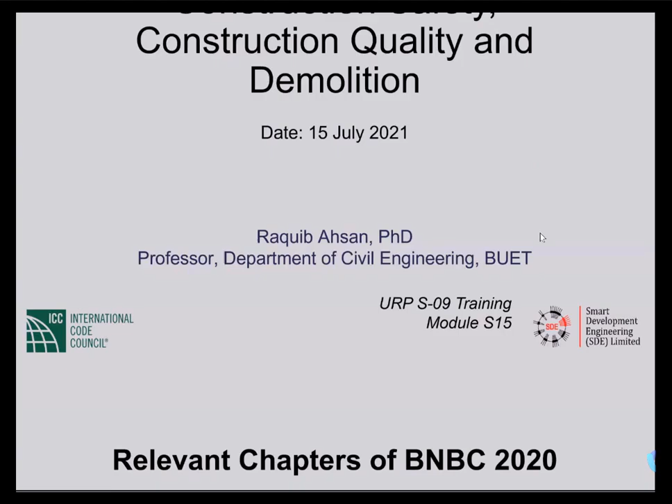So let's start today's topic, which is construction safety. Mostly it's about safety, then a little bit about construction quality and demolition. This is related to Part 7 of the Bangladesh National Building Code 2020, but it also involves some provisions of Part 1 Chapter 2, Part 5 Chapter 2, and some provisions related to concrete in Part 6 Chapters 5 and 6, but mostly it's Part 7.

So the outline of today's presentation is like this, more or less in line with the way it is arranged in BNBC 2020. First we'll talk about constructional responsibilities and practices, then storage of materials, safety during construction, safety during demolition work, a little bit about construction quality and quality control, which is evaluation and acceptance of concrete, and enforcement of these provisions.

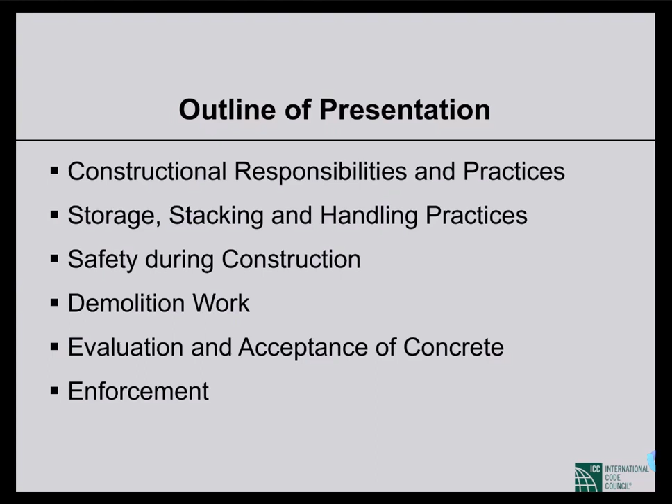So let's start with constructional responsibilities and practices. This is actually Chapter 1 of Part 7 in BNBC. The topics covered in this chapter are planning for construction, construction control, construction management, and very importantly, protection of public and workers, and environmental protection.

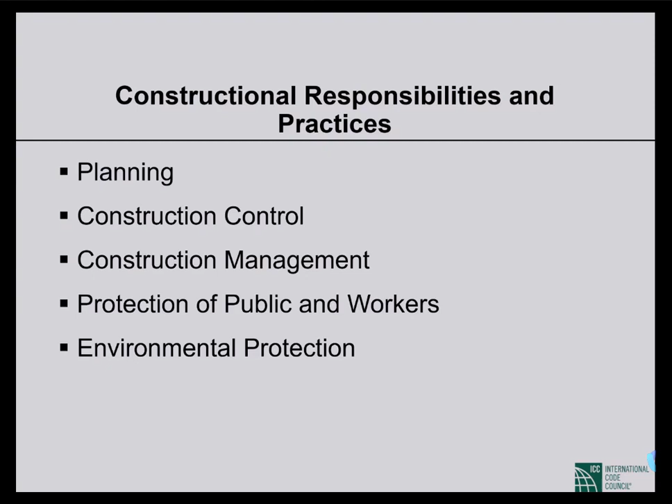So let's first start with planning. Everything starts with planning. For construction, planning is probably the most important phase. After design, before going for construction, a thorough planning is very much needed for a smooth construction.

Before planning, it's very important to know what are the responsibilities, and more particularly, responsibilities of different parties involved - the consultants involved in the project, the owners, the contractors. It should be very clear what are the responsibilities of which party - the owner, the consultants, the contractors - and this should be in black and white, not just understanding. It should be properly reflected in the contracts, in the contract documents, in the terms of contracts.

That is very important. If there is any vagueness in the contracts, that causes problems subsequently in the construction phase. This is very important. A good contract can ensure good construction. So that is extremely important. We have to be very meticulous about preparing a contract.

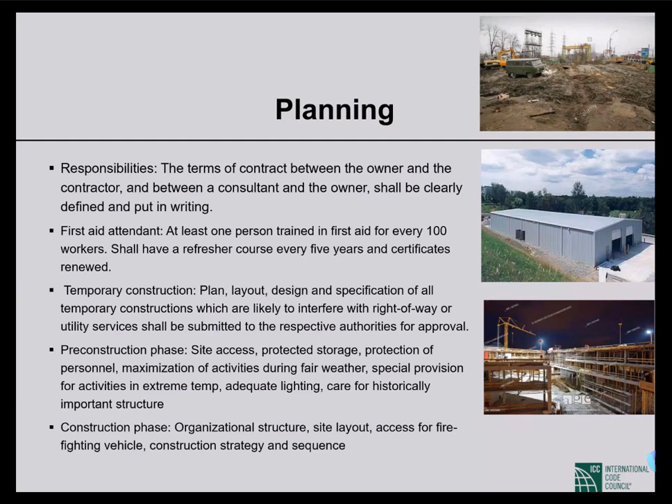Fire protection during construction is another very important topic. And in general, the construction strategy and sequence should be planned so that the whole construction phase could be completed smoothly. We'll talk about some of these issues a little bit more elaborately in the pre-construction phase.

During the planning phase, a suitable construction strategy should be adopted. This means a suitable construction method should be planned, along with an appropriate building system and appropriate materials planned in the design phase. For construction, competent and adequate manpower should be resourced. Similarly, proper equipment should be resourced, and for operation, proper operation techniques should be followed. All these should be given very careful thought in preparing the construction strategy.

And the construction strategy should also consider local conditions like local terrain, local climate, and vulnerability to disasters if there is any for that site.

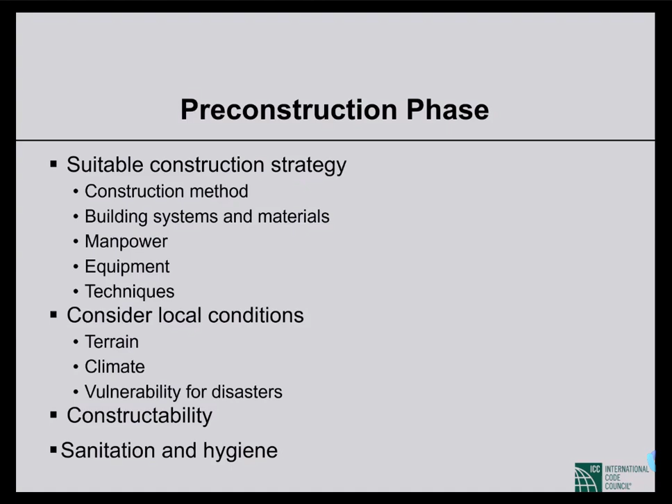When we talk about consideration of local conditions, there are some particular instances mentioned in the code, like in cities we should consider the restricted space available in city areas. So when planning for construction, we have to think about how to accommodate different equipment, warehouses, storage spaces, and toilet facilities, and that should be properly planned for, because space is not that much available in city areas.

And in city areas, in most cases, just beside a construction site there are adjoining structures. So we'll talk about that too - we have to take all the measures necessary to protect adjoining structures. This is the responsibility of the owner of the building that is going to be constructed.

And in city areas, utility lines are usually underground. So while excavating, we have to be careful so that we don't damage any public utility lines, like gas lines. Quite often that causes accidents, gas explosions, etc. So we should be aware of these things in cities.

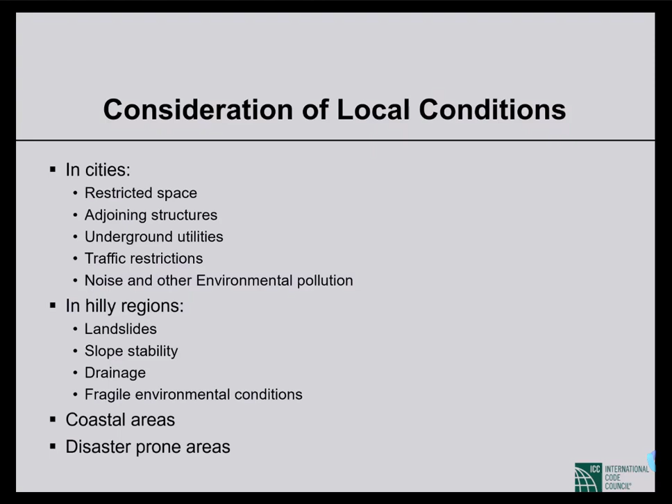In particular, when we have to go for construction in adverse weather, like in rainy season, in our case most of the time rainy season is the adverse weather. But sometimes, like in very hot and humid conditions, we have to go for different types of construction activities. Or in very cold weather, although in Bangladesh we don't have that problem. But if you go to a foreign country and engage in construction activities, you should know. But this is, of course, BNBC, so we'll talk about only Bangladesh.

So site layout which enables accessibility in adverse weather. The site access should be such that even in adverse weather, there is no problem in accessing the site. Like in our case, there should be canopies so that in rainy weather we can protect our equipment and people from rain.

Adequate protected storage for weather sensitive materials and equipment. We'll see in the storage of materials chapter that materials are classified into 5 types. One of them is weather sensitive materials. For example, cement is very, very sensitive to weather, very sensitive to humidity. We all know that. So we have to think about how to store them properly, cement, and other weather sensitive materials and equipment.

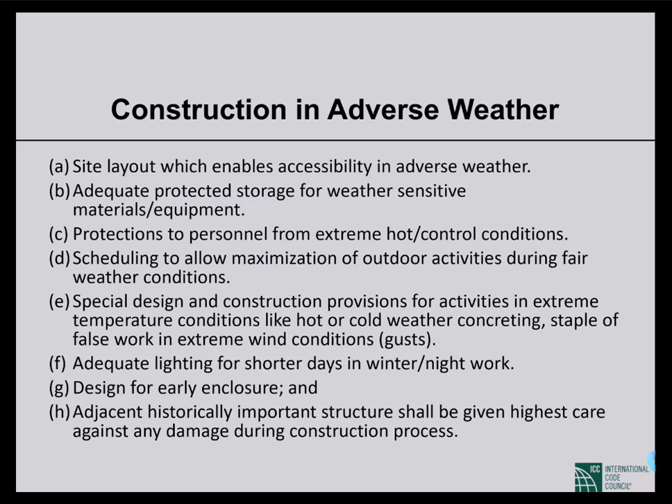During construction phase, the site layout is very important. We should have a proper drawing of the site layout, and in it, everything should be marked clearly, like the access and exit should be easy with proper parking, because trucks supplying materials have to be parked. So those parking areas should be properly marked, and there should be separate vehicular and pedestrian access and exit.

In the same access, people and vehicles should not access in the same way. There should be different access for pedestrians and vehicles. That is one thing. Another thing is the ground condition should be leveled so that the access is easy.

Properly located material stores for easy handling and storage. It is not a good practice to have a material store quite far from the location of construction. It should be placed in such a way that the entire construction site is within reasonable distance.

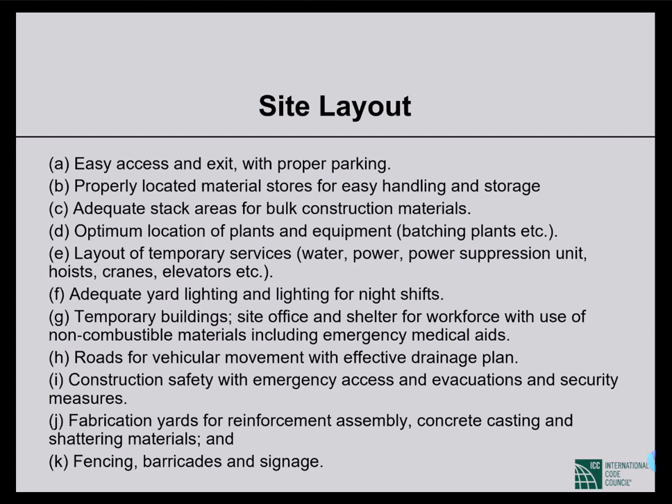As I was saying, access for fire trucks and firefighting equipment vehicles should be there at every construction site. This access shall be provided at the start of construction and maintained until all construction work is completed, so for the full duration of the construction this access should be there.

Free access from the street to fire hydrants or static water tanks, where available, shall be provided and maintained at all times. In Bangladesh, we don't have fire hydrants available near a construction site most of the time.

But there should be a source of water that can be accessed in case of fire, and that source should be easily available. During building operations, free access to permanent, temporary, or portable first aid firefighting equipment shall be maintained at all times. For different types of fires, we use different types of fire extinguishing equipment - sometimes we use sand instead of water. Those should be kept in such a place which is easily accessible. In all buildings over 2 stories high, at least one stairway shall be provided in usable condition at all times.

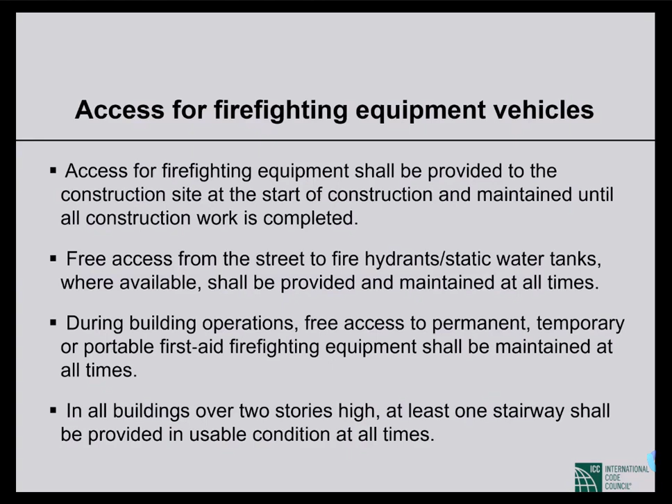Now, those were related to planning. Now we'll talk a little bit about construction control. Construction control is more related to the control by the authority, or from the authority side. So one control the authority would require is site preparation.

In any case, the client will always first want to see if you have prepared the site or not, as a contractor. So bush, debris, etc. shall be removed. Temporary buildings should be so located as to cause minimum fire hazard, made of non-combustible materials, etc. So whatever you put on the site plan or site layout, you prepare the site accordingly.

Then permits - storing materials on roads, using public utilities, digging roads, storing explosives, affecting historical structures - for the activities for which you need permits, you should acquire the appropriate permit.

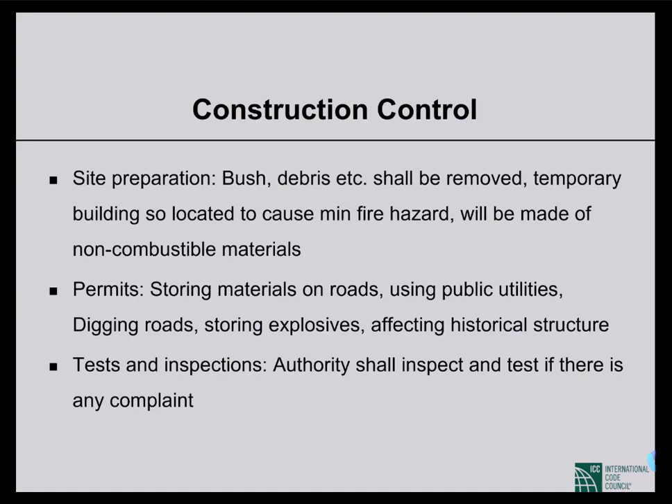Construction management - there are many other provisions in the code regarding construction control, but I have just picked a few points. Now we'll talk about construction management. When construction is going on, how will the contractor manage? What are the issues that a contractor has to think about, has to take into consideration?

One is time management. There are deadlines for construction, and there are schedules and plans to meet the deadline. But in many cases, there may be situations where there are delays, or changes in the sequence of construction activities. So in those cases, the contractor has to think how the deadline will be achieved in spite of these changes.

So that is time management. I think you are quite aware that now there are many different BIM tools and other project management tools that can be used for this purpose. So this is well practiced, right?

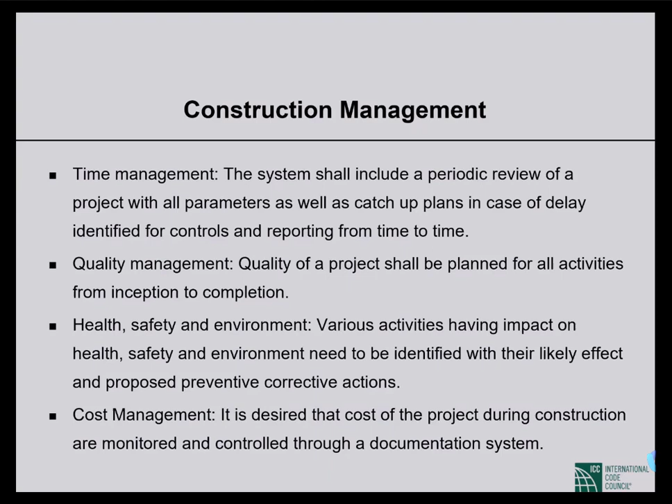Now, the important things, quite elaborately in detail, this is described in the code, that is protection of public and workers. This is quite a large section or article in the code. I have picked only a few points from there. So first of all, adjoining property.

We'll talk a little bit in detail about these. So no part of any structure except signs shall project beyond the property line. Basically, nothing but only signs can be outside of your property line. But if you need, you can take permission from the proper authority or the owner of the adjoining property to use some space from the adjoining property.

Protective fences and railings. On the top right side, you can see a fence, and in the middle you can see railings shown in red and yellow color. There are quite detailed relevant provisions mentioned in the code. Railings, for example, railings adjacent to footpath or excavation shall be at least 1 meter in height. I'm just quoting these to show you how detailed the code is about all these protective fences, railings, canopies, overhangs, platforms, etc.

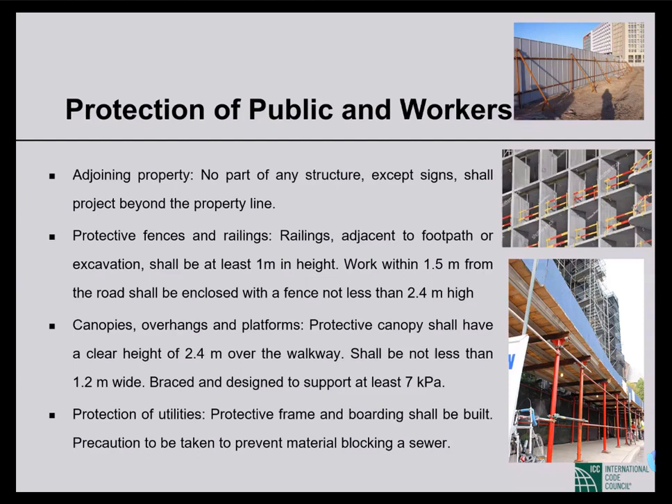More provisions related to protection of public and workers: use of road and footpath. I have already mentioned this, that it may be used - it is not prohibited. This is not good practice, but sometimes you cannot avoid this. So you may use a road or footpath only temporarily during construction, but with permission. You have to take appropriate permission from the city authority, like in case of Dhaka it will be either DNCC or DSCC.

Dhaka North City Corporation or Dhaka South City Corporation - construction shall be more than 1.5 meters away from a railway track. In no case can you do construction activity very close to a railway track; it has to be at least 1.5 meters away.

A walkway shall be constructed. So when you block a road or footpath, you should build a detour, a walkway, so that pedestrians can use that. A 1 meter clear passage shall be maintained - so from the construction activity and that walkway there should be a distance of 1 meter.

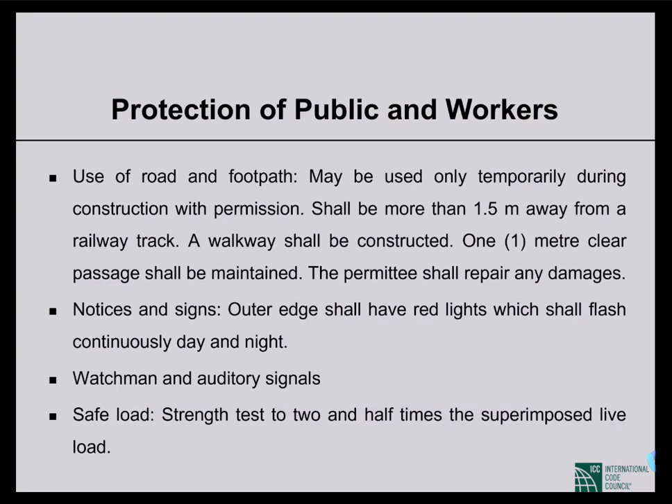Safe load: strength test of 2.5 times the superimposed live load. That is the safe load. For any temporary installations, like canopies, platforms, overhangs, boarding, etc., the safe load for that installation should be at least 2.5 times the superimposed live load that the structure is supposed to endure or take. So the factor of safety is basically 2.5 in this case. That is the definition of safe load for construction related installations.

Now, environmental protection of public and workers. There are some issues from the point of view of environmental protection. The first one is protection of existing drainage systems and utilities. I've already mentioned that in no case, because of construction activities, can the existing drainage or utility lines be blocked or damaged.

So you have to take proper protection for that. Protection of soil, aquifers, and water channels. The water bodies and the land should be protected so that we cannot pollute the water bodies and land.

Safe transportation and disposal of all wastes. There may be many types of waste that can be harmful for the environment, so they should be transported safely and disposed properly.

Waste oils and other petroleum derived wastes shall not be allowed to be used as dust suppressant. We are quite familiar with this problem of dust at a construction site. Those who commute to Gazipur are aware of this - dust is a major problem at a construction site. Dust should be suppressed only by water, not by oil or other petroleum derived material, because those are not good for the environment or for public health. So water should be used as a dust suppressant.

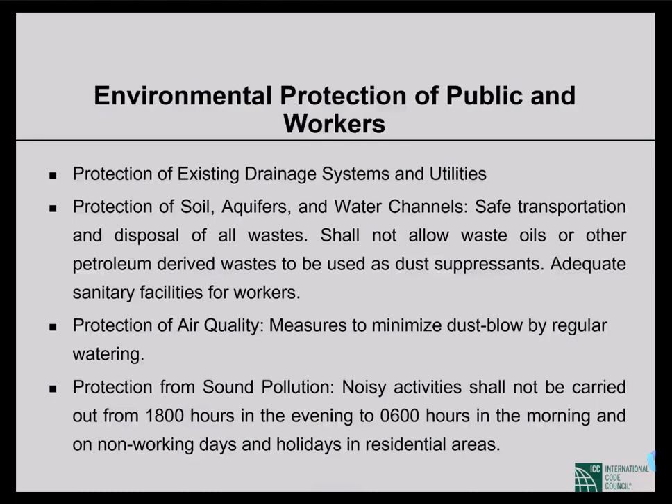Then, as I said, we'll talk a little bit elaborately about how to protect adjoining property. Number one: the owner of the building under construction shall preserve all adjoining structures and walls from damage. So it is the responsibility of the owner to protect all adjoining structures.

Second, if required, the owner of an adjoining plot, building or structure shall be granted necessary permission to enter the construction site, if he or she wants to visit your plot to make his own property safe - that's his privilege. Any structure, except signs, shall not project beyond the property line of the site - that is generally true.

Everything should be within your compound, your property line, but signs can be outside your property line. Sometimes you may need to use some space out of your property line. In that case, you have to take permission.

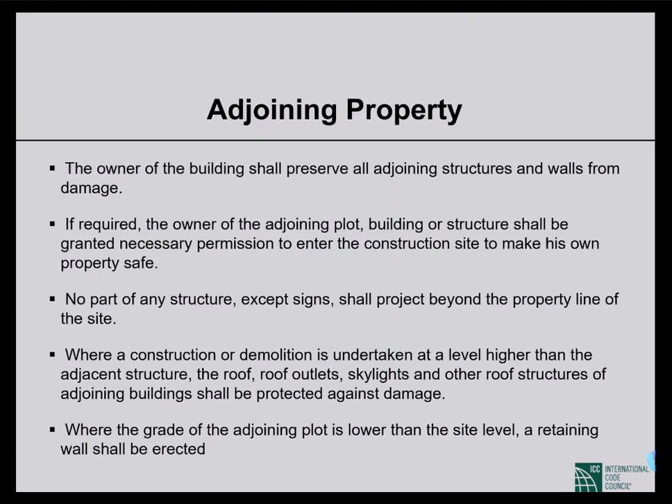So these are some points regarding how to protect adjoining property. But remember, this is the responsibility of the owner of the building. If you want to provide some kind of overhang that will go out of your property line to protect the adjacent structure, and the owner of the adjoining plot doesn't permit that, then it becomes the responsibility of the owner of the adjoining plot. So if something happens, the responsibility will go to that owner. This is also written in the code. So that was all related to constructional responsibilities and protection of public and workers.

Now, before going to the safety issues during construction, we'll talk about how to store materials in a safe and proper way. This is chapter 2 of part 7 of BNBC 2020, about storage, stacking, and handling practices.

Number 1, each workman shall be provided with suitable equipment for his personal safety as necessary. Here we're talking about PPE, personal protective equipment, which we'll talk about later too. For handling purposes, the workmen involved in handling materials should be using proper protective equipment so that they are not at risk.

Then protection against fire is another important consideration while storing materials. Combustible materials should be stored separately. Two types of DCP extinguishers at both open and covered locations. Different types of extinguishers should be at hand in case fire erupts.

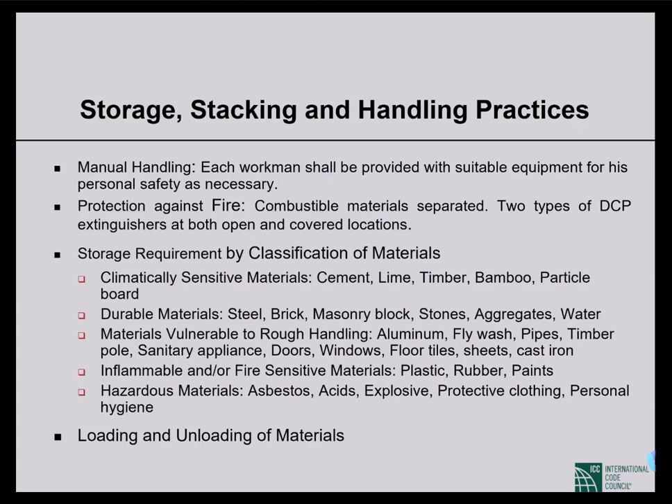So now, as an example, I'll explain a little bit about how to store cement. I think those involved in construction sites know very well how to store cement bags, but there are some code provisions we have to be aware of, like the maximum number of bags we can store, how to stack them. Do you know that?

Many of you might know, but some of you may not be aware that the code has provisions stating how many bags can be stacked. So let's see the provisions.

Cement should be stored at the worksite in a building or shed which is dry, leak-proof, and moisture-proof. Naturally, we cannot store cement bags open in air. We should store them in an enclosed space, and usually there are no windows in those enclosed spaces, or at least we don't open them. They should always be blocked so open air doesn't enter, but at the same time the enclosure should be dry, leak-proof, and moisture-proof.

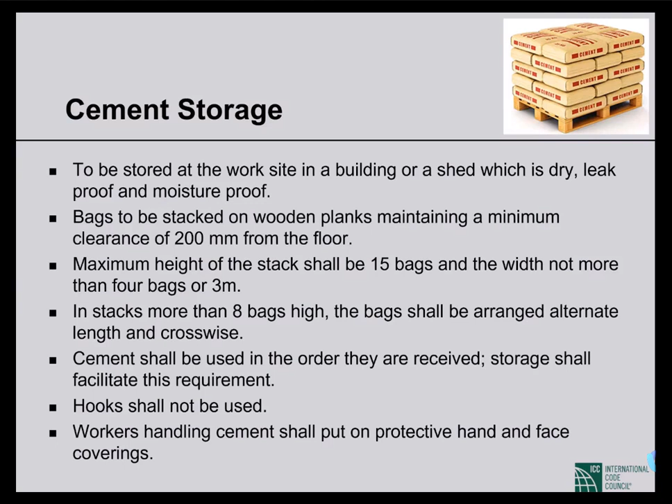But we seldom see that at construction sites in Bangladesh. At least hand gloves should be used. According to the code, both face coverings and hand gloves should be used. So these are some points related to cement storage. There are many other points in the code, so please go and read that section for better understanding of how to store materials. Cement is an example of a climatically sensitive material.

Now, steel is an example of a durable material, so let's see how it should be stored according to the code. It mentions that reinforcement bars and structural steel sections, not only reinforcement bars but also structural steel sections like I-sections or channel sections, shall be coated with cement wash before stacking.

So when you expect your steel has to be stored for a long time, you may coat the steel sections or bars with a very lean cement wash, where the water-cement ratio will be very high. It's kind of a grout, but not even grout, it's a cement wash. You use a little bit of cement in water and spray it on top of the rebar or steel sections, so that cement grains are deposited on the steel, giving some protection against humidity for prolonged exposure to weather.

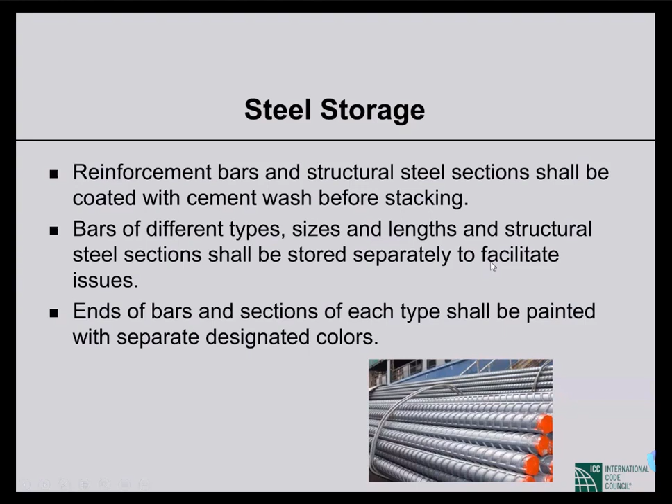So that's all about steel. Then another example of a durable material, which I'm mentioning because it's important: many times accidents happen from brick stacks falling on top of construction workers. So you should know the limits, how many bricks can be stacked on top of each other, what is allowed in the code, that we should know.

Number one, the stacks shall be 50 bricks long, not the height. In length, you may place 50 bricks, 10 bricks high, not more than 4 bricks in width. So 50 bricks long, 4 bricks wide, and 10 bricks high. Those are the limits, so we should be careful about stacking bricks.

It should never exceed 10 bricks high, but quite frequently you can see at the construction site that this is not maintained. Sometimes the height of the brick stacks is quite high, and width quite high, so that they fall and cause accidents.

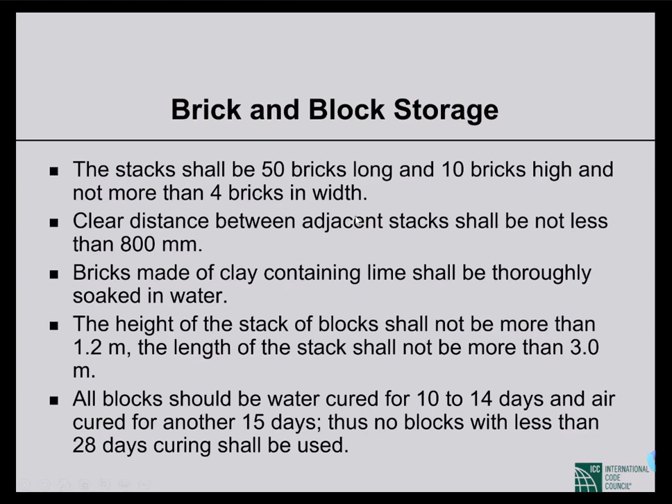As an example of breakable material, we can talk about glass sheets. How glass sheets can be stored. All glass sheets shall be kept dry and stored in a covered space. The reason glass sheets should be kept dry is not because they are climatically sensitive, but

for the convenience of handling. So if the glass sheets are not dry, if they're wet, it's very difficult to handle them, to take from one place to another, to carry them by hand becomes difficult. So that's why they should be kept dry and should not be stored in open air.

Glass sheets shall be lifted and stored upright on their long edges, both for storing and for lifting. They should not be lifted flat or stored flat; they should be stored and lifted upright. Like in the picture, you can see the glass sheets are almost upright.

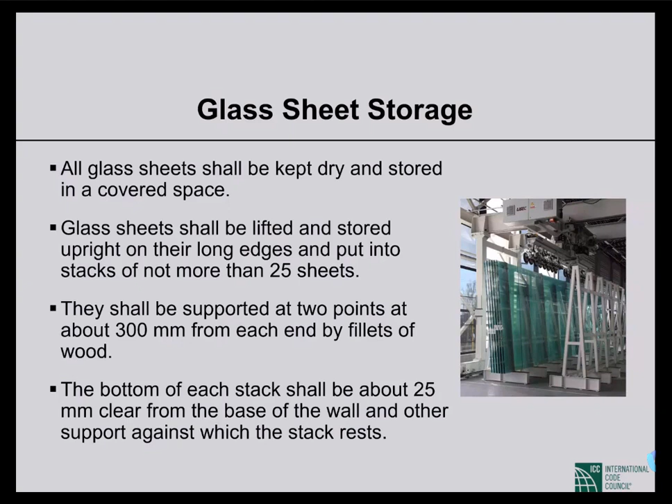So this is an example of how to store glass sheets. There are many other points written in the code about how to store and use glass sheets, how to transport them, etc. So I have just quoted some few points from there.

So we talked about how to store cement, how to store steel sections or rebars, how to store bricks or blocks, how to store glass sheets.

And now this is an example of inflammable materials, paints, varnishes, etc. They are inflammable, they can easily catch fire. Paints, varnishes, lacquers, thinners, and other inflammable materials shall be kept in properly sealed or closed containers. So naturally, you just don't put them in a drum without any lid, not like that. They will usually be in sealed and closed containers.

The containers shall be kept in a well-ventilated location, free from excessive heat, smoke, sparks, or flame. This is absolutely essential, that they should not be kept in congested locations where there may be heat gain because of congestion, and the place where paints and varnishes are kept should be absolutely free from any kind of smoke or flame.

There are many examples of fire that broke out from the storage of paints. This is very common because paint is very inflammable.

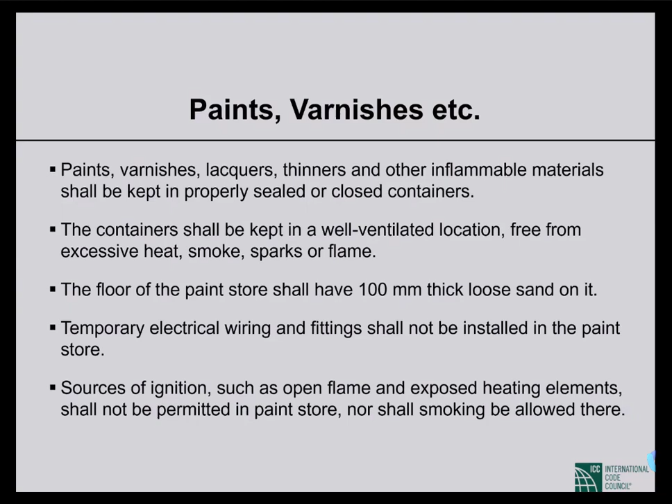We seldom store acids in a construction site, but for some reason, if there is a chemical factory or some construction needs any kind of acids or corrosive materials, like sometimes you may need bases too, which is also harmful.

So to store this type of material, which are harmful for your health or skin, physically harmful, how do you store them? Store acids and bases in separate cabinets. Naturally, you don't store acids and bases side by side because they react. Or you keep acids and solvents in different cabinets. Those chemicals which can react with each other, you store them separately.

Label shelves for quick chemical identification. For example, if you don't label an acid container as acid, this is very dangerous. You can use that liquid for some other purpose which can harm people. So proper labeling is very important.

Make sure that incompatibilities are not stored on the same shelf. As I said, those which can react with each other, you keep them separately. Keep same shaped bottles on the same shelf to conserve shelf space. This is not just for conservation of shelf space, it's also convenient to handle.

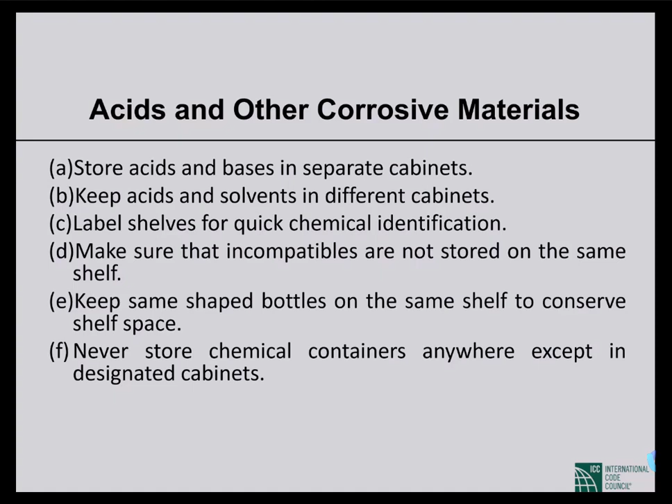I have just quoted some points as examples. This is an example for hazardous material - provisions on how to keep explosives and other different types of materials. This is a very long, exhaustive list where the code specifies, for different types of materials, how to store them, how to handle them, how to load and unload them. All the provisions are written in chapter 2 of part 7. I'd suggest you read that - it will be very useful for proper construction management.

So we have talked about responsibilities of different parties during construction and how to protect public and workers. Then we talked about how to store different types of materials. Now let's talk about what are the safety precautions or provisions that we should follow during construction. This is chapter 3 of part 7 of the Bangladesh National Building Code, BNBC 2020.

You should have a mechanism in place, a standard procedure, so that safety is maintained at the site. Number one, you all know the phrase 'safety first.' Safety is the first and foremost consideration you should think about when planning and managing a construction. So who is at risk? Most at risk are the workers. For the safety of the workers, the first thing you need are safety equipment, or PPE - personal protective equipment.

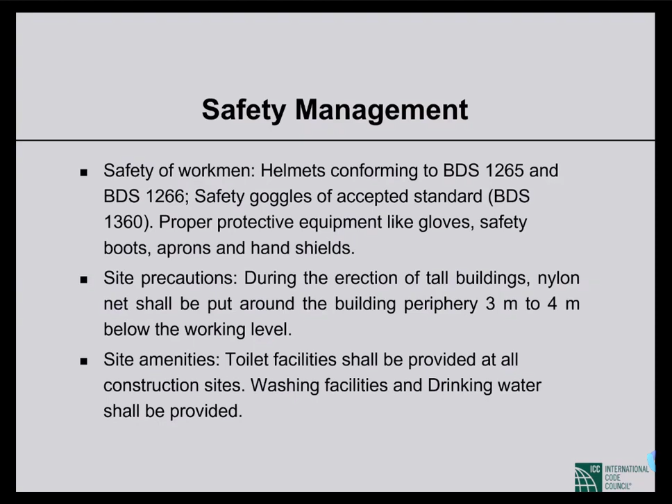Now let's see some PPE: hard hat or helmet according to BDS 1265 and 1266. Safety goggles - when you are welding you need this type of goggles, or when using some granular material you use this goggle. Nose mask or face mask - when using granular material you use this too.

Ear muff or plug to protect your ear in noisy conditions, say when cutting, which is very noisy and can harm your eardrum - so you have to use an ear muff or plug. And a reflecting jacket, when there is a chance of interfacing with the public, you use this kind of jacket for visibility so that people can see you from afar.

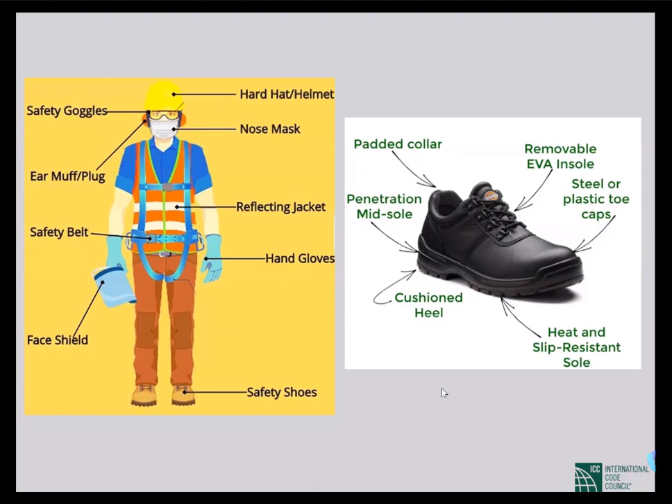And for the helmet, we should always check if the helmet is in good condition, like some shock absorbing material should be on the top, just above your head. There should be some shock absorbing material.

And the chin strap that you pull at the back and tighten to properly place the helmet on top of your head, that chin strap should be okay. Before using, you should always use that chin strap to tightly put the helmet on top of your head.

And the third is you put the chin strap below your chin. You pull the chin strap and bring it below your chin, and around both ears. So that is the correct way of wearing a helmet. Just showing, because sometimes we don't follow all these.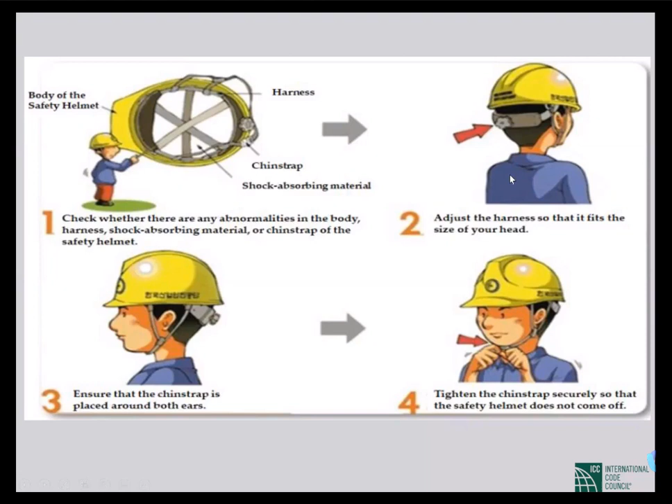And so those were about PPE, different types of PPEs. Now, for different types of construction activity, we need different types of precautions. For excavation and foundation work, for pile rig, we need a different types of precautions. For construction of walls, floors, concrete work, formwork, scaffolding, we need another different set of precautions. For erection operations like erection of steel structures, electrification equipment and operations - as I said, electrocution is a very common accident at construction sites, so we have to take precautions. Different types of construction hazards, and for high-rise buildings, we have to have different sets of precautionary measures.

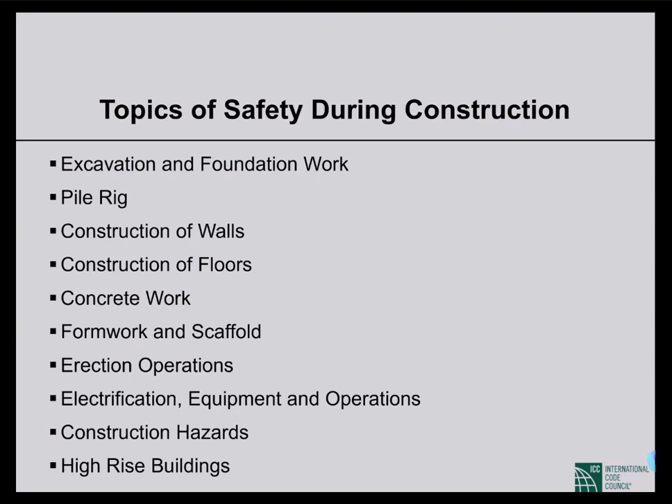For excavation and foundation work, this is a very, very long chapter, so there are many provisions for each of these activities. I'll just quote some examples. Like for excavation and foundation work, excavation machinery shall be kept away from the trenches by a distance of at least equal to the depth of trench, to a maximum of 6 meters.

So they should be kept at a distance so that the excavation machinery doesn't cause caving of the slope, caving of the sidewall of excavation. Excavated materials shall be kept away from the edges of the trench - again for the same reason, you should not put all the excavated material on the edge of the trench. You may first place them on the edge, but you should immediately remove the materials from the edge of the trench.

Groundwater shall be drawn away from the excavation. So sometimes you may need to use pumps to draw the groundwater away from the excavation, the trench. Ground conditions - adequate precautions against quicksand, loose fills, etc. shall be taken to protect the workmen so that the ground doesn't settle suddenly. So for that, you need to take protection.

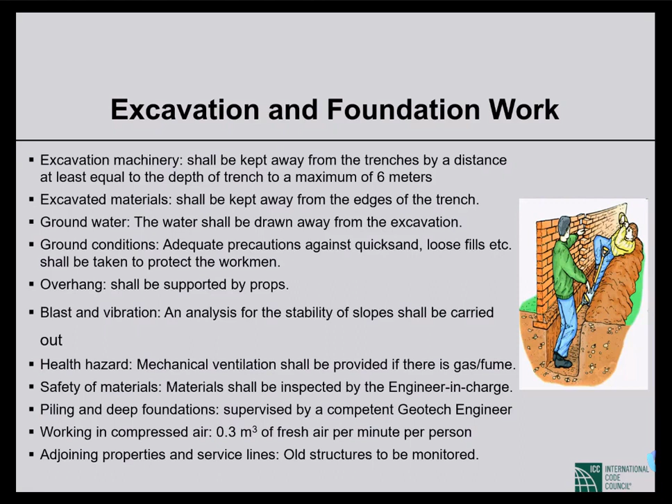You can have some cracks in the brick walls, like infill walls, in an adjoining structure, but those may not cause any structural problem - still you should monitor them. If there is any crack in a concrete member, then you have to take measures. So monitoring of adjoining properties may be necessary.

For bored piles and for push piles, a little different type of pile rig is used. Erection of pile rig: the frame of the rigs shall be structurally safe for all anticipated dead, live, and wind loads. So even for wind loads, dead loads, and live loads, you have to be careful that structurally they should be safe.

Operation of pile rig: access to working platforms and top of pulley shall be provided by ladders in the manual type. At the top you have a pulley, and you should have some access by ladder. You can see the rig has some steps, so using those steps one can go up to the pulley. Working platforms shall be protected from wind and rain.

Piles shall be prepared at a distance. For precast piles, the piles should not be cast very near to the rigs, because of hammering and other disturbances the casting will not be proper. So there should be a distance from the casting yard of precast piles and the pile rigs, and that distance should be at least equal to twice the length of the longest pile from the pile driver.

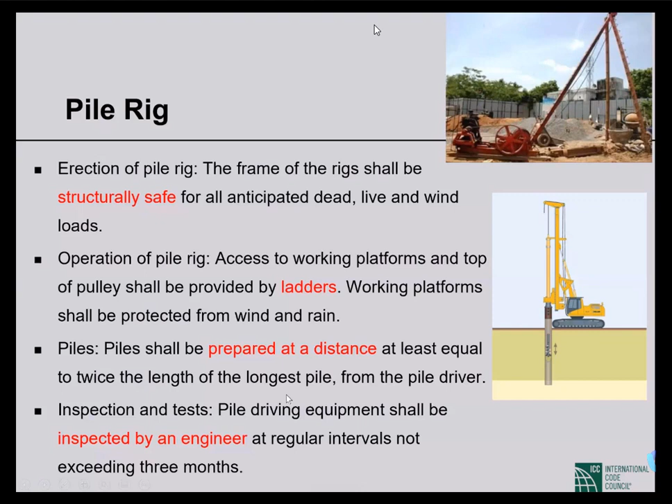Construction of walls: the scaffolding for wall construction has to be checked after every 15 days in rainy season and 30 days in dry season. So the scaffold should be supervised.

Then ladders: rails of ladders shall extend at least 1 meter above the landing. Some ladders may have rails, so that you can hold the rails.

The sides of the ladder that you hold are the rails, and the rails must be extended at least 1 meter above the landing. You cannot put the ladder just on the edge of a landing, since there's a risk it may slip and fall off. So it must be extended, meaning you should place the ladder so that there is still ladder extending from the edge of the landing.

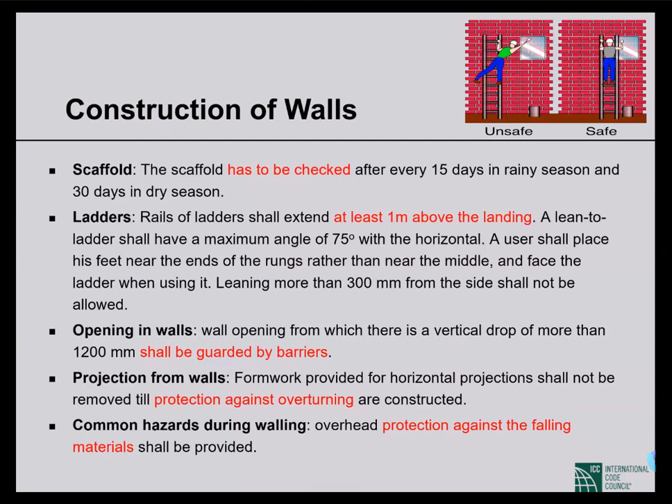There are some interesting provisions now about construction of floors. Use of sheets: joints in corrugated galvanized iron sheets are kept secured. You do not just put CGI sheets with overlapping - you make sure the overlaps and joints are secure.

Platforms: a working platform required according to the type of roof shall be provided, depending on the type of roof, while making the formwork or shuttering for the roof. For a flat roof, the formwork shall be frequently inspected for defects. Enough walking platforms shall be provided in the reinforcement area - this is usually done in Bangladesh, where walking platforms let you walk and inspect the reinforcement. This is a common practice.

Openings and holes: every temporary floor opening shall either have a railing of at least 900 millimeters height or shall be constantly attended. If there is an opening in a floor, there is a risk of falling, so either you place a railing about 3 feet high, or keep someone there to constantly attend and give warning if someone comes near the opening.

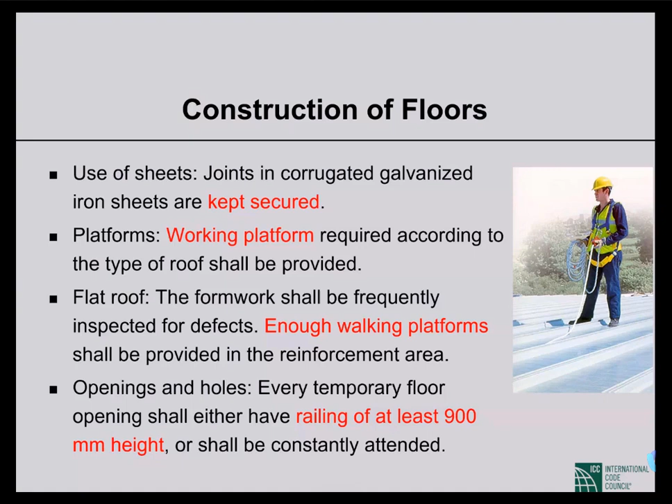So these are some provisions related to construction of work of floors. Now, for concrete work, many provisions are there. I'm quoting just a few.

For pre-stressed concrete, no person shall stand in line with the tensioning elements and jacking equipment during the tensioning operation. So if the cable breaks, it is thrown very strongly from the jacking equipment. So if someone is in line while tensioning, this is very risky.

Also, no one shall be directly over or near the jacking equipment when deflection is done. No one should be there. I don't know what is meant by deflection exactly, sorry, I have to check.

Workmen shall be prevented from working behind the jacks when the tensioning operation is in progress by putting signs, barriers, or protective shields. So where jacking operation is going on, you have to take protection so that in case of accidents, people don't get injured.

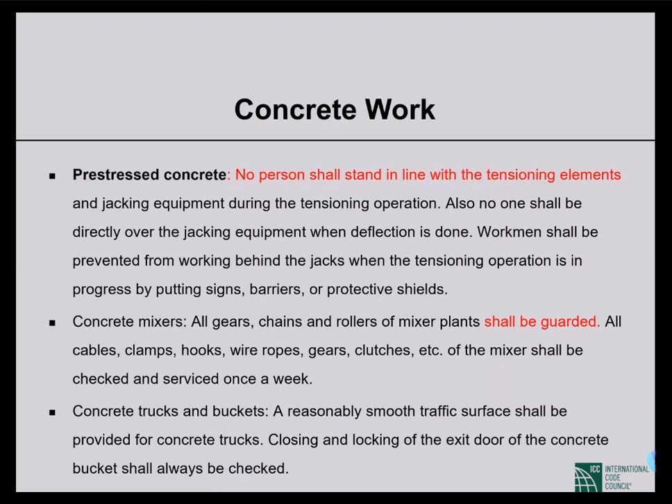Formwork and scaffold: scaffolding and centering materials, horizontal and inclined bracings shall be provided for posts higher than 3 meters. We know that usually we have inclined bracings and horizontal bracings for scaffolding and for centering materials, like props.

Spans of beam bottoms shall be supported by posts at most 1 meter apart. If steel is used, the spacing is usually 1 meter.

All scaffolding exceeding 20 meters or 6 stories in height shall be constructed of non-combustible or fire retardant materials. This is important. We cannot use bamboo props or timber props for working above 6-story height. For buildings above 6 stories, we cannot use bamboo props; we have to use steel props.

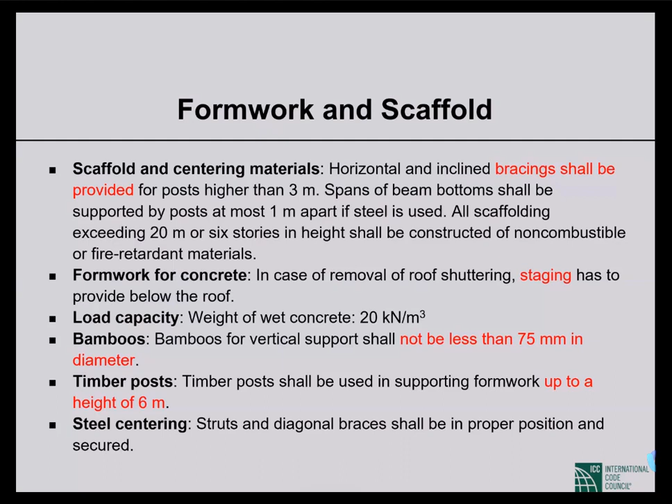Erecting operations - this is very critical because many accidents happen during erection. Erection and hoisting: ropes in operation shall not be touched. The ropes of the winch and others used for erection purposes should not be touched because that can hurt you.

The ropes shall be chemically treated to resist dew and rotting. They shall not be tied beyond the reach of safety belts complying to BDS 1359.

BDS 1359 is actually regarding safety belts. How to use the safety belts is there in BDS 1359.

Small articles, bolt baskets and similar containers with handles shall be provided on floats or scaffolds where small materials such as bolts and drift pins are used. So you keep the bolts and these small articles in a basket, in a bucket with a lid preferably, so that they don't fall.

Hoist protection. A material hoist shall not be used to transport workers. Temporary elevators shall be installed if necessary. So using the same hoist, you don't transport people and material. For materials, you use a separate hoist. For people, you use temporary elevators.

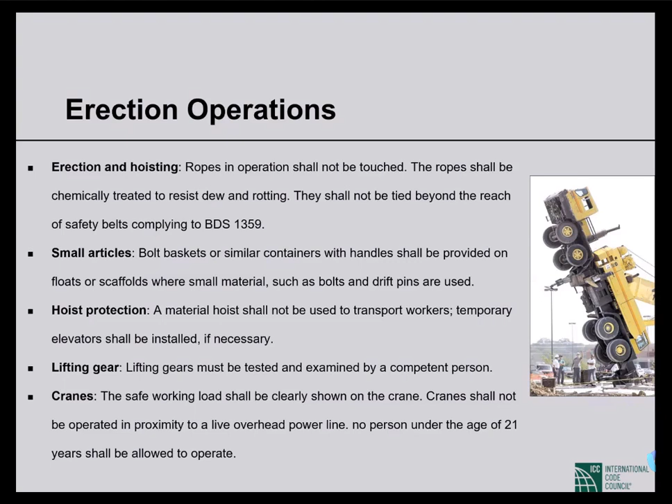Electrification equipment and operations, wiring system: no scaffolding, ladder, working platform, gangway, runway, etc. within 3 meters of an uninsulated live electric wire. So if you use temporarily these things like scaffolding and ladder, usually they can be made of steel. They should be kept at least 3 meters away from a live wire.

The main switchboard shall be located in an easily accessible and prominent place, so that in case of an accident, a worker can access the switchboard very fast and turn off the switch. And carbon dioxide extinguishers, CO2 extinguishers, should be available. Dry powder extinguishers, DCP extinguishers, should also be available, etc.

And there are many other clauses. Please read the code there. This is quite interesting for a proper construction manager. These are very, very important. I'll just skip this one.

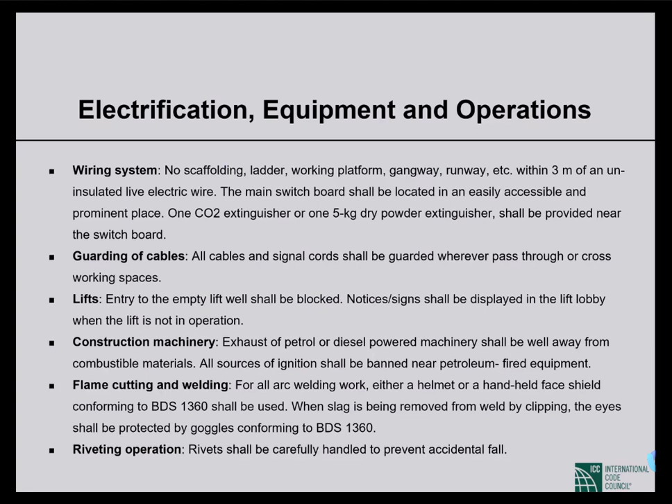For construction hazards, you should be aware of fire hazard, health hazard, skin hazard, and noise hazard. So you should use protective equipment to protect your skin and your health.

Noise hazard: for levels up to 110 decibels, properly fitted earplugs shall be provided. Exceeding 120 decibels, noise protection helmets shall be provided. So you can use earplugs if the noise is up to 110 decibels. If it exceeds 120 decibels, earplugs alone will not work. You should use helmets having mufflers, which protect your eardrum from noise.

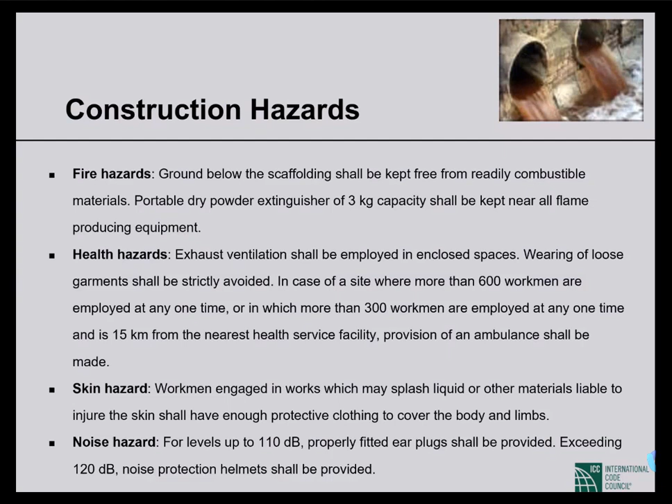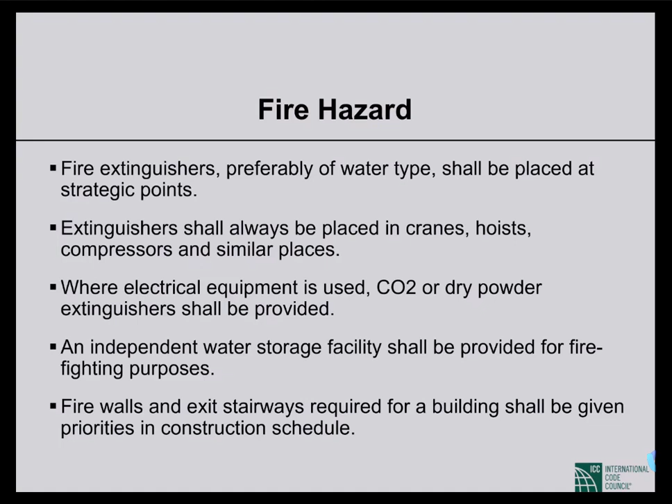For fire hazard, at the construction site this is taken very, very seriously. There should be water storage facility from which, in case of fire, you can extinguish it. There should be a separate exit stairway. I think I have mentioned most of these in previous slides.

Now I have run out of my time, but still I want to take a few more minutes to introduce these topics to you, so that you know they're in the code. I know there are many engineers who are not aware that there are chapters related to construction in the code. Most engineers think that the building code is for the designers only. But there is a separate Part 7, dedicated to construction, issues related to construction.

Demolition is a very, very critical activity from a safety point of view. There are many issues: how you should plan, what sequences you should follow, if you use blasting and explosives what safety provisions you should follow, and how you should lower, remove, and dispose of materials. This is important.

This was there in our previous code, BNBC 2006, but still we had an accident like the Rangs building accident. You know, Rangs building, a 22-story building, was being demolished. That was in the year 2006 probably. But even in the 1993 version of the code, these chapters were there.

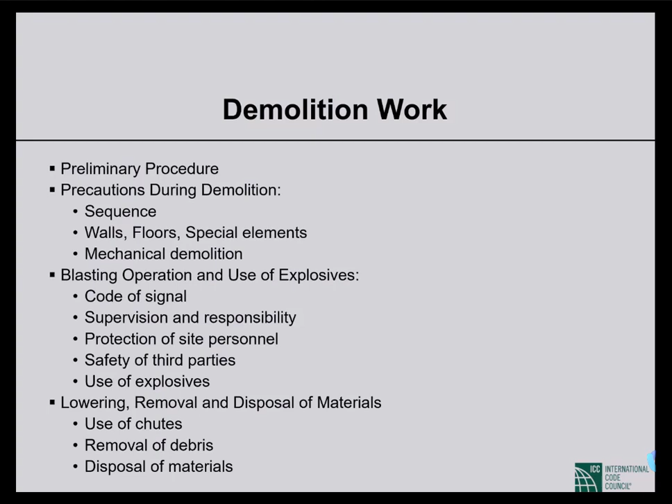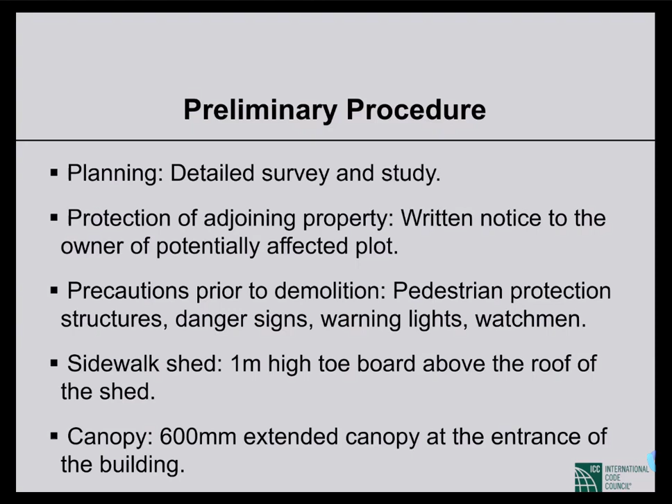Because they didn't follow what was there in the code. So you have to plan properly, protect the adjoining property, provide a shed in the sidewalk, provide a canopy, things that I have already mentioned.

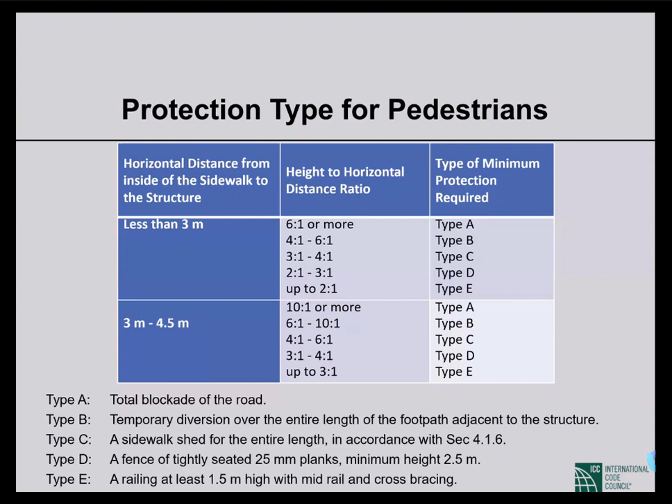From the demolition side, depending on where the sidewalk is, or where the public property is, or the distance from the adjoining property, different types of protective measures should be taken. There are 5 types: type A, B, C, D, and E, depending on the distance.

How to demolish walls, how to demolish floor, how to demolish a truss, a heavy beam, an arch - these are all there in the code.

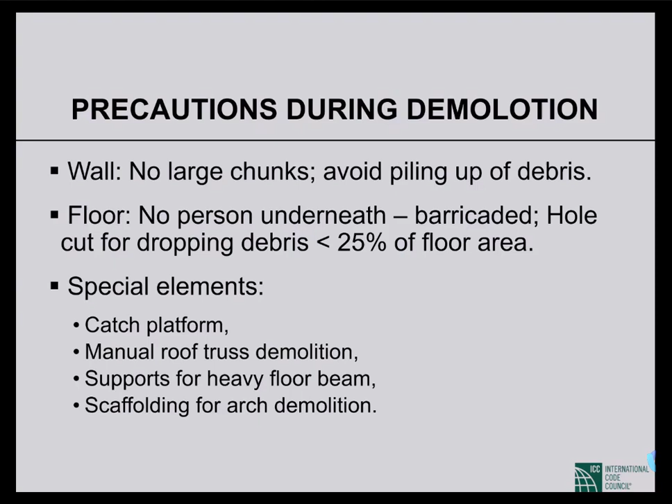For cast in situ RC members, what should be the sequence of demolition? First, demolish the partition walls and non-load-bearing member components. Then remove the slab. Then attach the beams with ties, expose the reinforcement from the sides of the beam near the supports, then cut the reinforcement. So you hang the beam with the ties, lower the beam very slowly onto the ground or floor, and dispose of the beam from the floor.

Once the beams are demolished, you tie wire guy ropes on top of the columns and use a winch with the wire guy ropes. You cut off and expose the base of the column, cut the reinforcement there gradually, and pull with the winch to pull the column down. You bend the reinforcement at the bottom, then cut the reinforcement, and remove the column. These are the sequences usually followed when manually demolishing an RC structure.

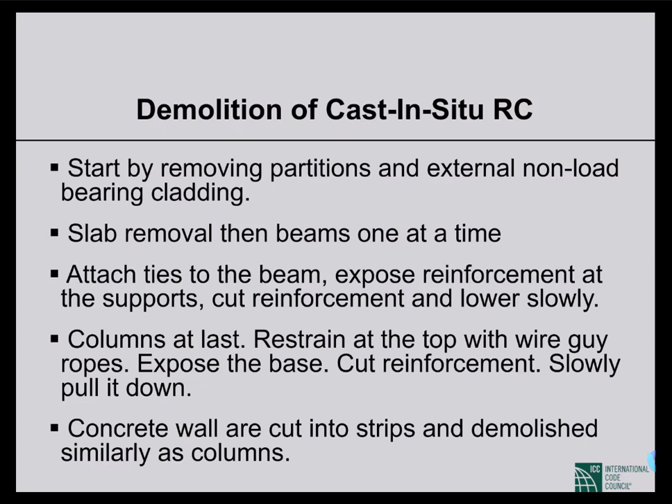Sometimes we use mechanical devices like weight balls or power shovels, which we usually call bulldozers or power shovels. But for buildings above 25 meters of height, these mechanical devices are not allowed. Only for buildings of height less than 25 meters can we use mechanical devices.

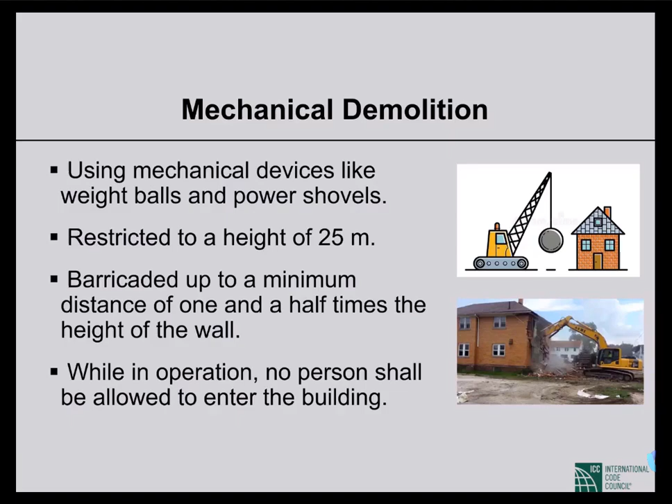So there are many other issues. I'll just keep those for the time being - I think I have mentioned most of them.

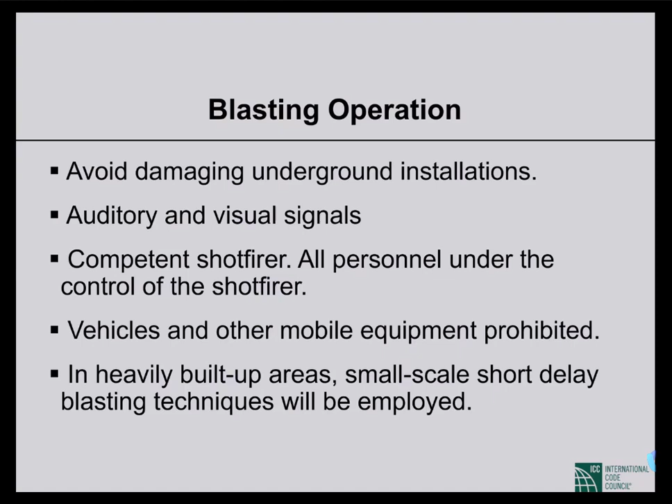For blasting operations, one thing is very important: the shot firer. A person experienced in shot firing is called a shot firer, or competent shot firer. They should be certified, and all other personnel should be under the shot firer. There should be a chain of command, and at the top of the chain of command should be the competent shot firer. This is very important in blasting operations.

You can see there should be chutes, this kind of chutes, and all the debris should be disposed of through these types of chutes, so that you don't make a stack of debris on top of the floor slab. Use chutes, and remove the debris through the chutes.

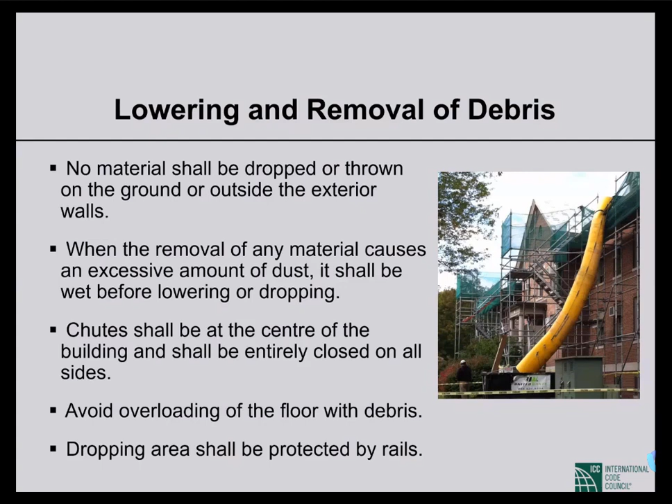After the demolition activity, you should clear all the rubbish and water, and you should disconnect all utilities, or cap the utility connections like gas connection and water connection. They should be properly capped. This is called regularization of the plot.

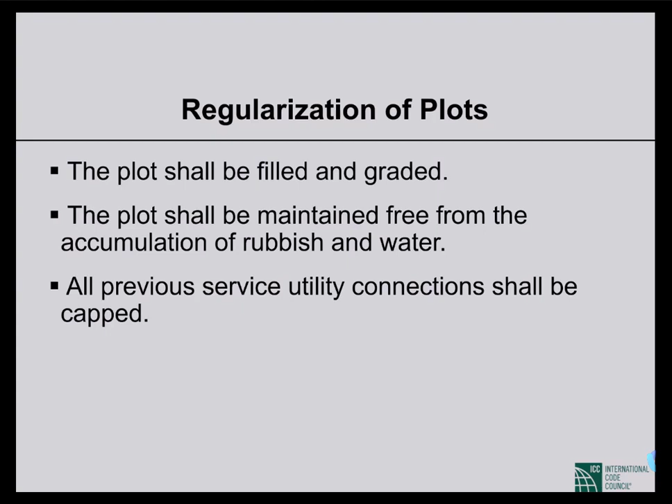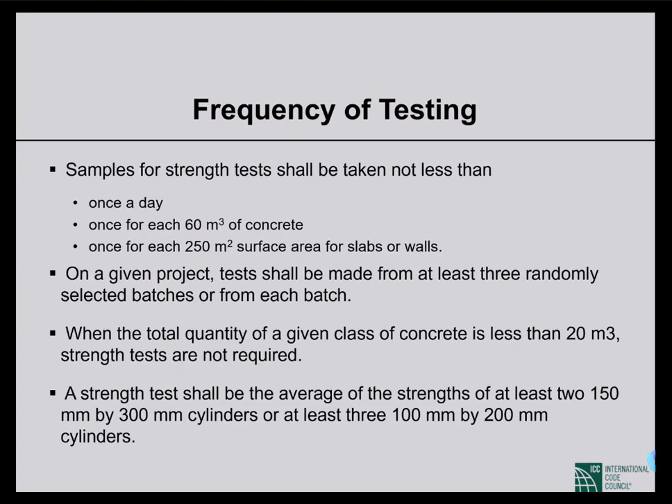Now I will skip this part on evaluation and acceptance of concrete, because I think I have mentioned this in my webinar on concrete - how many cylinder tests should be done, what is the acceptance criteria, if it fails then what should be done, the load tests, etc. I think I have mentioned them there, so I'll skip them, but this is related to quality control.

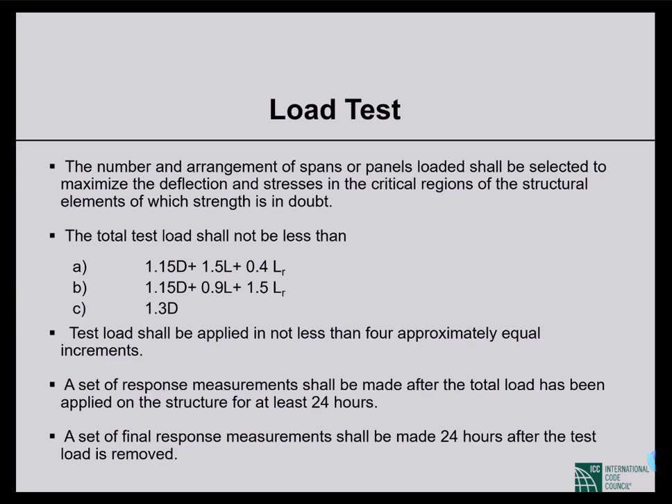So, acceptance criteria for load test.

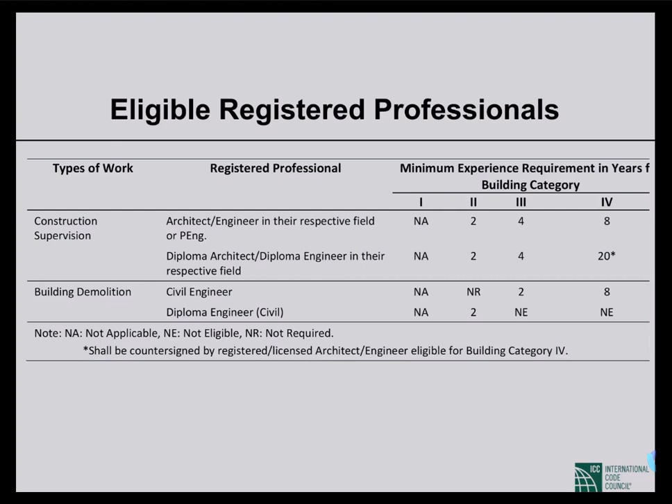This is one thing regarding enforcement: all works relating to a building or structure regulated by provisions of this code for which permits are required shall be subject to inspection by the building official, that is the authorized officer. Modalities and frequency of such inspections shall conform to the requirements put forward by the approving authority.

This is a gray area in our code. In the building code, there is no mention about frequency of inspection, when the inspectors will conduct inspection. In the Imarat Nirman Vidhimala, it is written that while your building is at the plinth level, the inspector will inspect if the setbacks are properly maintained, etc. So there will be an inspection at the plinth level, but whether there should be an inspection at every floor level after that is not written in the code or in the Imarat Nirman Vidhimala. So this is a gray area.

So in the S9 project by RAJUK, ICC is going to suggest the frequency of inspections for RAJUK.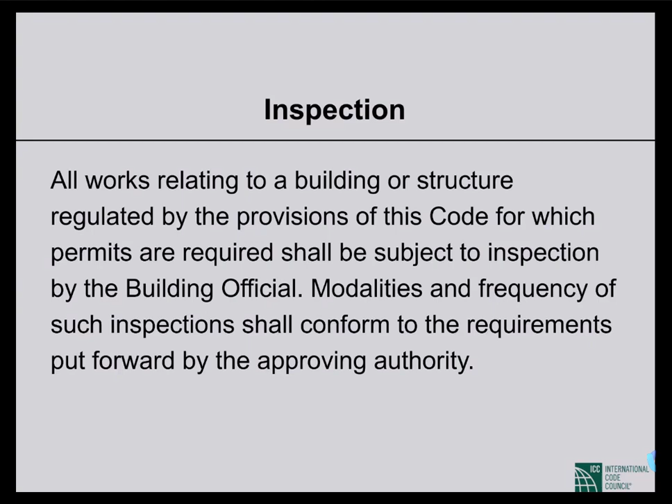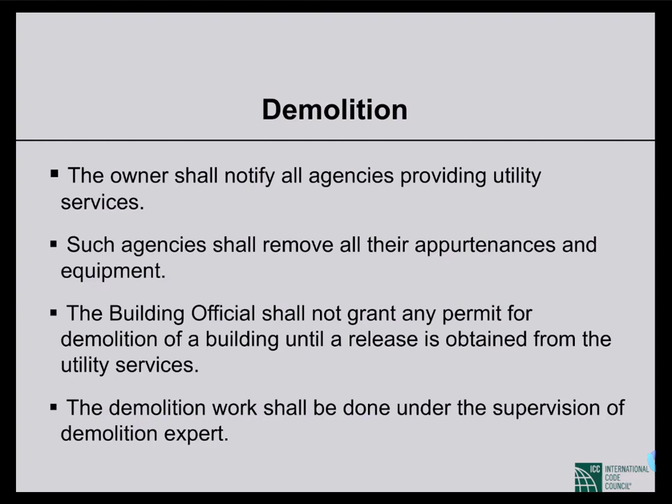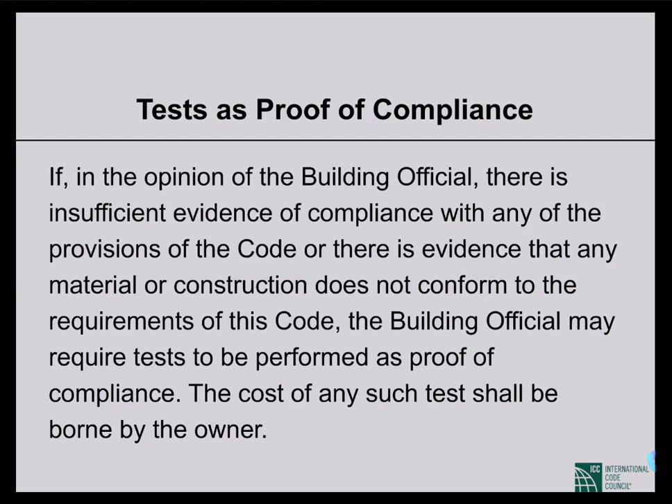So these were the enforcement related provisions. What I tried to do in this webinar is introduce you to Part 7 of the building code, because I found that many engineers are not even aware that there is a part in the code which deals with construction activities, construction safety, etc. I just wanted to introduce you with some examples of different provisions. But if you want to know exactly or completely all the provisions, you have no other choice but to read that specific part of the code.